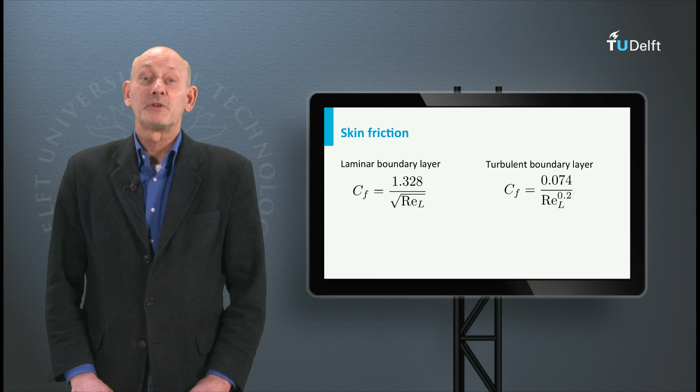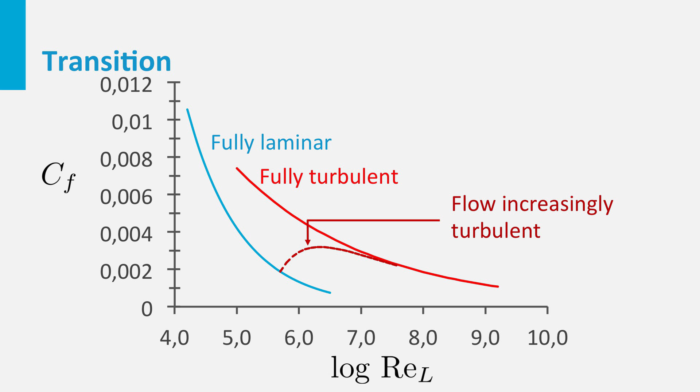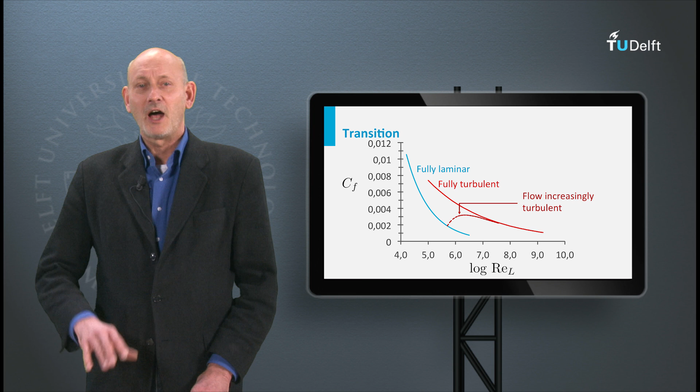At a certain Reynolds number, the skin friction of the flat plate goes up. This is the point where transition on the plate takes place. So, with increasing Reynolds number, a bigger part of the plate has a turbulent boundary layer, which is reflected in an increasing skin friction coefficient, until transition reaches the leading edge and the plate is turbulent over its full length.

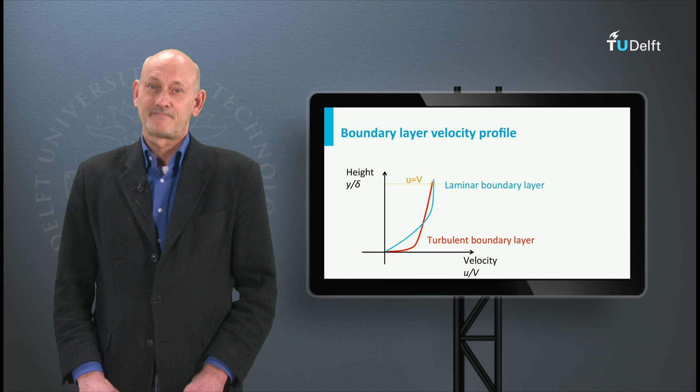This slide shows the difference in the velocity profile between the laminar and the turbulent boundary layer. As you can see, the average velocity near the wall of the turbulent boundary layer is higher, which results in a higher skin friction. What we did not yet discuss is the transition process that transfers a laminar boundary layer into a turbulent one.

If a fluid flows along a flat plate at zero angle of attack, at some point the laminar boundary layer will change character. At this point, at some distance x from the flat plate leading edge, it will start to go turbulent. The Reynolds number based on this distance x and the free stream velocity is called the critical Reynolds number for a flat plate, just as there is one for the pipe flow in Osborne Reynolds' measurements.

An exact value for this critical Reynolds number for a flat plate at zero incidence is not so easy to establish. Measurements show a broad range of Reynolds numbers, since many variables play a role in the boundary layer development, such as surface roughness and the possible small disturbances in the free stream. In literature, often a lower boundary of 500,000 can be found.

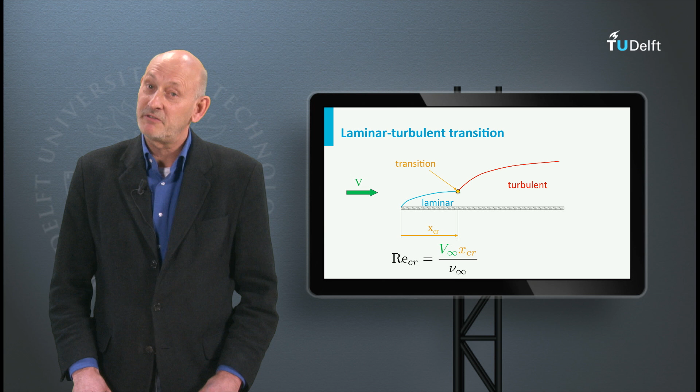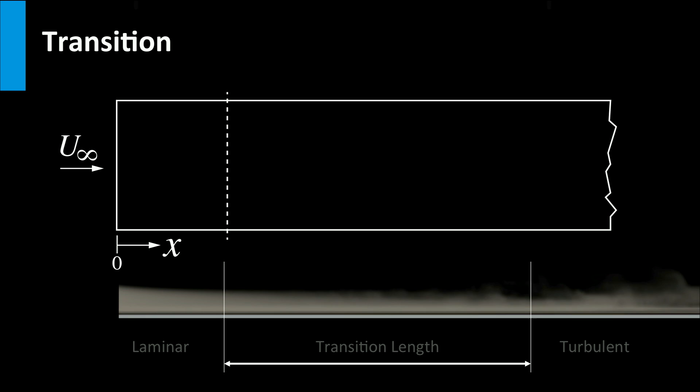If we follow the boundary layer as it flows along the flat plate, then a number of stages can be identified. First, the boundary layer is laminar as it starts at the leading edge of the flat plate. At some distance from the leading edge, two-dimensional disturbance waves begin to form in the flow called Tollmien-Schlichting waves, or TS waves, after the two researchers that studied this behavior in detail.

Further downstream, these oscillations grow in amplitude and develop into three-dimensional disturbances. And these vortices are unstable and break down as we go along the plate. They are followed by patches of turbulence in a surrounding of more or less laminar flow called turbulent spots. These spots grow both in streamwise and in spanwise direction. And when they have formed one front, the flow has become turbulent. This transition process can be sped up by surface roughness, adverse pressure gradient, and the like.

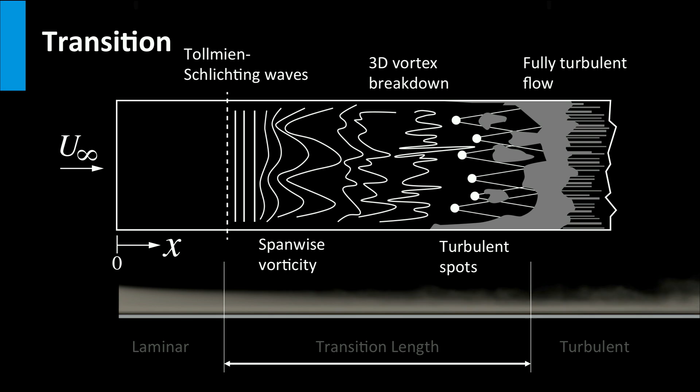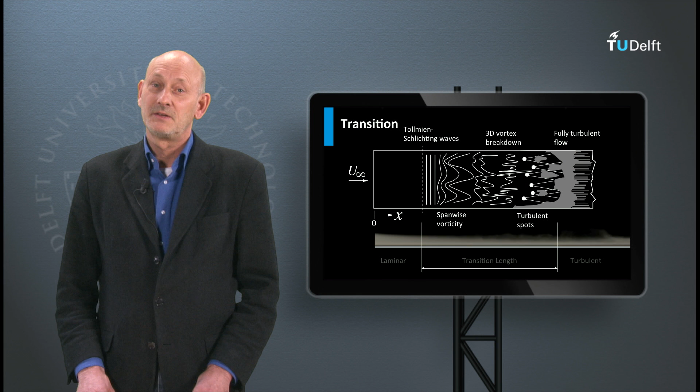Since it marks the beginning of higher boundary layer growth and increasing skin friction, you can imagine that it is worthwhile knowing where, for instance, on an airfoil transition takes place. There are several ways to establish the chord location of transition, and one of them is a method using fluorescent oil. The method is based on the fact that the turbulent boundary layer has a higher skin friction than the laminar counterpart. And this can be noticed in the way the oil is distributed over the airfoil.

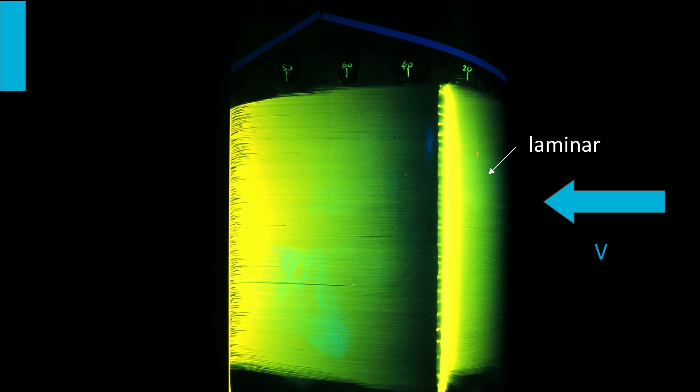In this picture, an airfoil is placed vertically in a wind tunnel. The model is covered with fluorescent oil and it is illuminated by a UV lamp. The flow comes from the right and it starts laminar. The laminar skin friction decreases as we move along the model, and at some point, at about 35% of the chord from the leading edge, there is a black area with little or no oil, meaning that the local skin friction has increased dramatically. And this is where the flow is turbulent. The thick yellow part in upstream direction is the transition region.

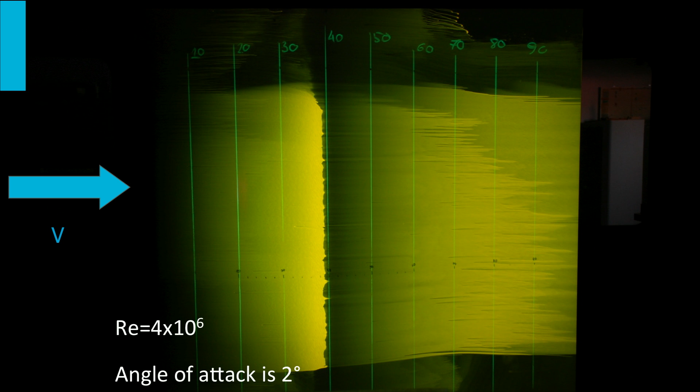In the next slide, you can see how the transition location changes with increasing angle of attack. Now the flow comes from the left. The green lines indicate chord positions. First, we have an angle of 2 degrees with a transition location close to 40% of the chord. If we increase the angle to 6 degrees, we can see that transition moves forward to about 33% of the chord. The turbulent boundary layer drags the oil that was located between 33 and 40% downstream.

As you may have noticed, transition is a complicated but intriguing process, and it is important with respect to the resulting drag of an object. It is sensitive to all kinds of disturbances, like adverse pressure gradients typically found on airfoils. Next time, we will investigate the pressure distribution around airfoils and how this influences the transition location.